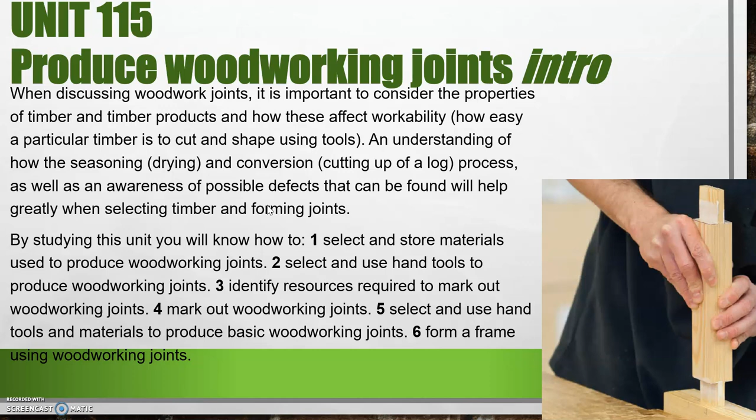So today's objectives are to state the origin of timber. Hopefully by the end of the lesson you'll be able to describe the difference between the types, name parts of a tree and even name characteristics of different timbers. As we go through, you're going to be getting to know these keywords, coniferous and deciduous, so I won't talk about them now, but pith is the centre of a tree, the very heart. It's often quite soft and not great to work with as well.

So you were asked this question at the start of the session: what do you think of when you think of timber? Tell me all the good things, even tell me the bad things, and what do you know about timber? Why is it so good? You can even tell me why it's so bad.

So timber for me, I think of my childhood. My dad used to bring home lots of pieces of wood. I used to knock a nail in and say, look, I made a boat. I used to make dens in the back fields out of wood. I used to make tree houses. And then as I grew up I became a carpenter and joiner, and these are some of the things I've made over the few weeks before I left to teach.

So I think it's a great material. It's carbon neutral, so even when you burn it, it won't let out more carbon than it's ever collected in its life. So it's not bad to burn. It's not particularly good either. It's neutral. Timber for me has character, look at this piece of oak, how it's got grain, every piece is different and it looks nice and it's warm to touch.

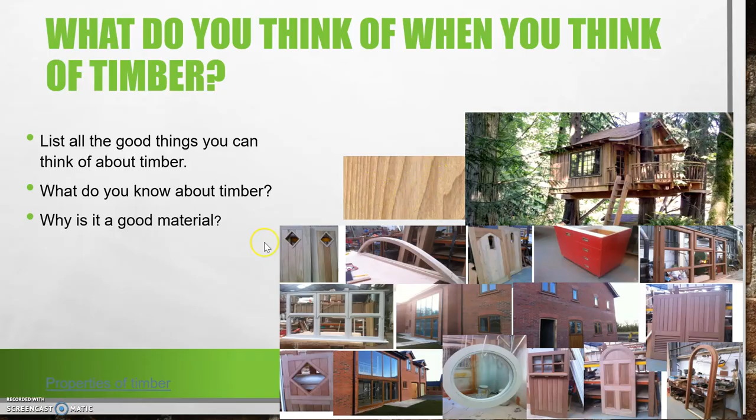So I'm going to explain some reasons why timber's so good, a lot of reasons that you might not have thought of and not many people know. Before I do, this resource is from Trada. If you go on their website, just type Trada into Google or a similar search engine, you can get your own account. It's free as a student, and there's loads of information, especially about timber and other building materials. So have a look at Trada.

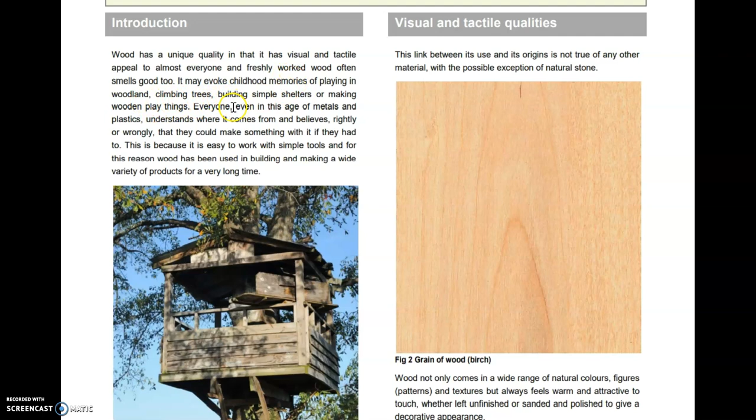So for many, timber evokes childhood memories of playing in trees, climbing. On a hot day, do you ever hear your gutters kind of crack? They're expanding because that's what plastic does in heat. So timber's a lot different. It's got thermal stability, so it doesn't lose strength or performance in the heat or cold. That's why Scott of the Antarctic decided to build his hut out of timber.

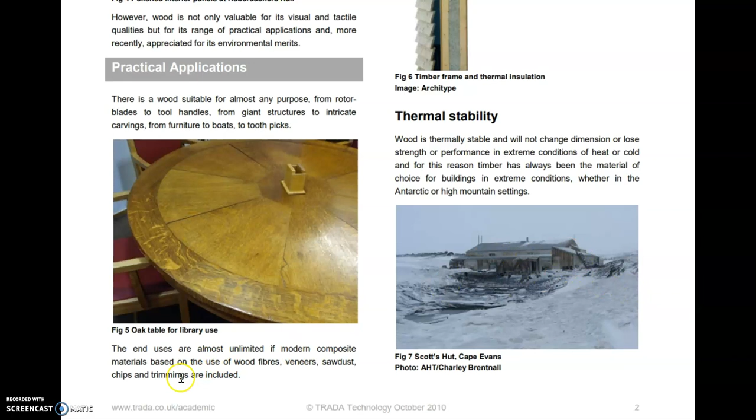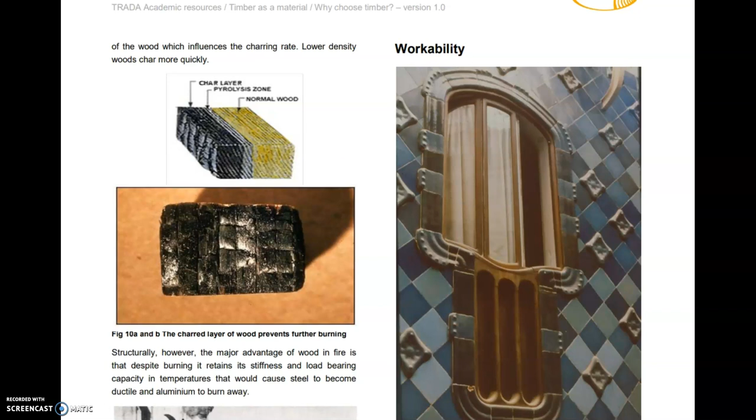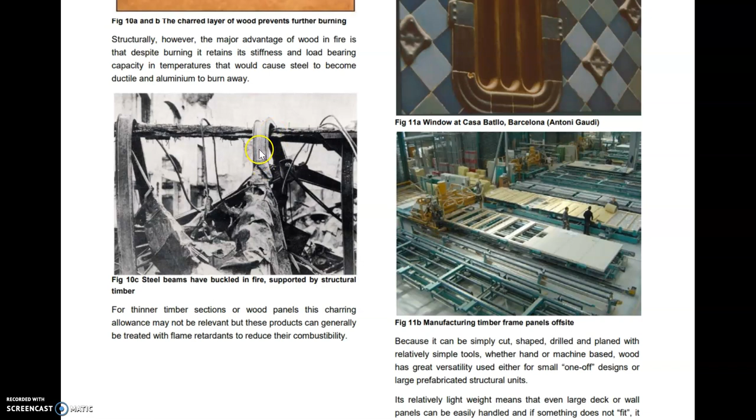Timber, believe it or not, can be even resistant to fire. I'm not saying it won't burn because it is a combustible material, but what happens is the outside burns and it protects the timber inside. So have a look at these pictures here. Here's a wooden beam still intact after a bad fire, and the metal has buckled, so the timber outperformed the metal on this occasion.

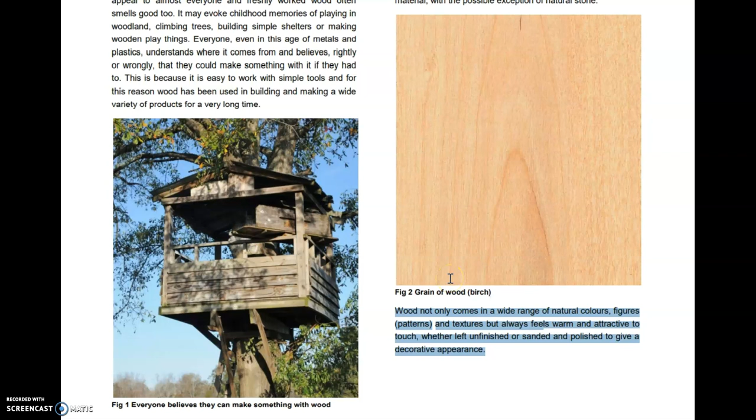So this is my last point really about why wood is such a good material. Even the desks at college and kitchen units, even though some of them aren't real wood, they make them look like real wood with melamine and formica and laminate, because it looks good, it looks attractive, it's warm to touch, and it gives a good decorative aesthetic appearance.

So now I want you to go and find out more about timber. The two main categories, hardwood and softwood. So we're about to find out a bit more about these categories.